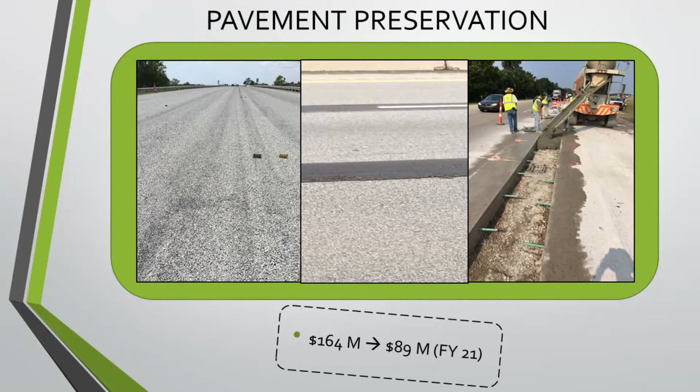So with that in mind, that's kind of the basis behind this particular presentation. I was talking with the designers, the developers, and that's why I went back to the basics on pavement preservation. So with that being said, I kind of felt a little greedy. Illinois is making the comment that they're at $30 million for their pavement preservation budget. And I'm up here about to cry that for FY21, they're cutting pavement preservation from $164 million back down to the baseline of $89 million.

Understanding that the definition of preservation is different for every organization, ours kind of breaks down into 2 different categories. Surface seal, so that being your microsurface, your chip seals, crack seal, and then what we call functional enhancements. So that's, with our agreement with FHWA, 1.5 inch mill and resurface, sometimes 2 inch, work along those lines.

So I wanted to focus on, when I was discussing with the designers, how can we go back to the basics of pavement preservation? And so I took the time to start discussing some of our most effective tools in the toolbox, looking at HMA preservation. First one being crack sealing. I do believe, Larry, that's kind of how the CPM program got underway at Michigan DOT. And ever since then, we've tried to keep it alive, because there truly is a benefit to it. You wouldn't think it of such a simple type of project, but it truly does pay dividends.

So in Michigan, we kind of look at it a handful of different ways. We have it as a pre-treatment for a lot of our surface seal fixes. So if we've got a microsurface, a chip seal, the ultra thin bonded wearing course, what we call paver placed, all these fixes, we require that there is actually a crack seal pre-treatment. Specifications dictate how soon that next treatment actually gets placed on it, whether it's a week, 2 weeks, so on and so forth. So crack treatment is definitely there as a pre-treatment.

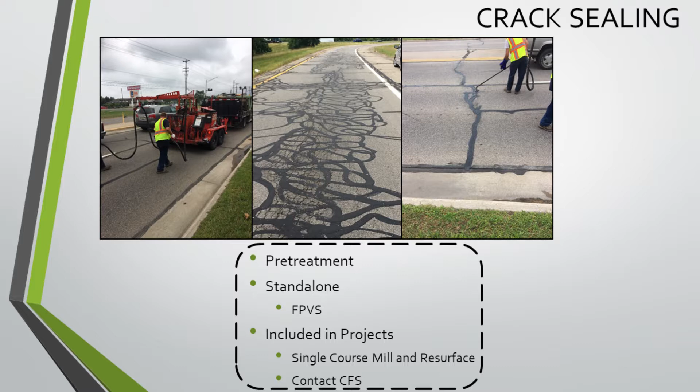We do a lot of standalone crack treatment projects across the state. We tend to utilize an innovative contracting method, a fixed price variable scope. That way we can try to stretch those dollars as far as we can. And then something we actually did for the first time this year. So one of the fixes that a lot of regions like to go to is a single course mill and resurface. In Michigan, unfortunately, we are plagued with way too many miles of composite pavements. So even on our single course, those reflective cracks are coming back through.

Well, in Michigan, we have warranties in place that say, hey, we can't jump on this pavement for at least 2 years, 3 years. Well, you're leaving those cracks open for 2-3 years before we can get on there with the crack seal. So what we decided to do is we built it right into the contract: here's our single course mill and resurface, and we're going to leave that contract open until the next spring. If there's cracks that wouldn't be covered under the warranty specifications, let's get out, let's seal them now.

That project was paved this spring, early summer. So I guess we'll come to find out this spring how many of those cracks actually reflected back through, to see how cost effective that particular method's actually going to be, and see if we want to move forward doing that.

So some of the picture in the middle, it was kind of disheartening getting called out to that site. I got calls going, hey, we got some cars sliding around. You want to come out and take a look and see if you can help us figure out why? That was pretty easy. I mean, I kind of hope for some harder ones.

Andy and I are always on the road all across Michigan. I think Andy was someplace else when I got this call, so luckily he didn't have to endure that one.

But some more on crack sealing, best practice. So I know ISA guidelines make the comment that we want to try to crack seal when the cracks are the widest to be able to make that crack seal material the most effective. However, in Michigan, when we're at those widest cracks, we usually have some form of moisture, whether it's rain or the white stuff. So we do the best that we can. We end up crack sealing in the summer months.

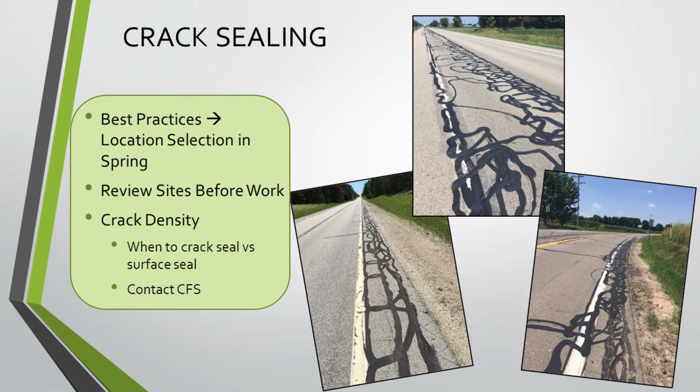However, what I've been doing is trying to encourage our region offices to go out and review these sites early spring to put together the contract documents. The worst thing for them to do is to do it before the winter, because what we start running into is that a road that looked like it was a good crack seal candidate going into winter may not be the same case after the winter, depending upon the winters, the freeze thaws. So I've been trying to get them to kind of push that, and I know that kind of messes with the lettings a little bit, but I think our contractors are responding accordingly.

To help provide our designers a tool, I've been working with our industry groups on trying to develop this concept of crack density, on the amount of cracking that is present within 100 feet, and try to keep it nice and simple. Obviously, nobody wants to spend a lot of time sitting on the side of the road looking at crack seal projects. So the idea was you got 100 foot, 12 foot wide, what type of linear footage of cracking, i.e. the crack seal material that's actually going to be down, makes sense to where, yes, it's a good crack seal candidate, it's a marginal, or we should really be looking at some type of other treatment, a surface seal treatment.

Like I said, I'm in the process of working with our industry groups to try to finalize that, and also try to put some pictures together with that so that our designers and construction staff can go out, take a look and go, like on these fixed price variable scopes, maybe we skip this priority because it's too far gone and we're going to create a hazard for the traveling public. So more to come on the crack density as we move forward.

Chip seals, by far one of the most cost-effective fixes that we have in our toolbox. Again, we were kind of looking at the use of chip seals. Typically, we see these on our rural routes. Northern Michigan, not a lot of traffic, pretty low risk, safe place to put them. However, we've been getting very good performance out of our chip seals, so I've been challenging regions to try to start pushing that envelope a little bit.

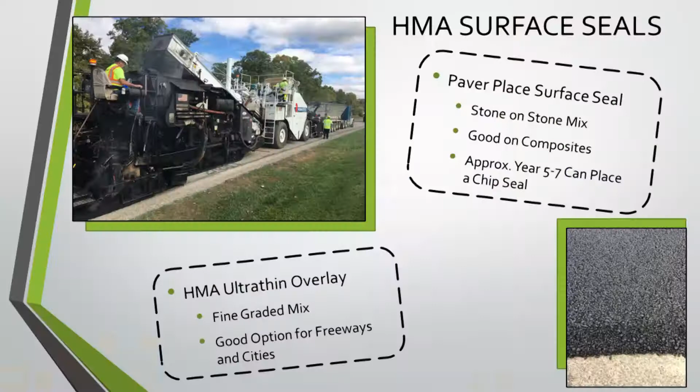I mean, we're seeing good performance out of them where we have them. They seem to be performing pretty good on our composite pavements, which is a plus. And what we've found, at least on one of our projects, is that within year 5 to 7 of them being down, they appear to take a chip seal pretty well, to where we can just kind of continue that PM cycle on that pavement.

The other thing that we have out there is our HMA ultra-thin overlay. I think that is relatively close to what everybody refers to as a thin lay. It's a dense graded, fine graded HMA, standard HMA. And again, we're seeing pretty good performance out of those as well. A lot of different tools in the toolbox when it comes down to HMA preservation.

However, we always seem to kind of fall short when we start talking about concrete preservation. And so that's what I really wanted to hit on with our designers, because again, we're really quick to let our concrete pavements go, which we have a fair amount of miles of in Michigan. We let them go to where we're like, okay, we'll drop some money, we'll do some patches, and then we're going to put a 2-course overlay on them. And in my opinion, you're just kicking the can down the road, because now you just made a mess for yourself to clean up later.

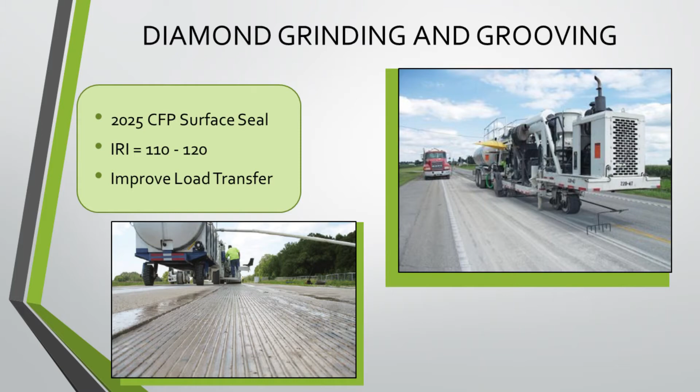So why not start getting on these pavements a lot earlier with the diamond grinding and grooving. Part of our pavement management data that we collect is the ride, which I think everybody does, seeing as how it's a federal requirement. And we've been kind of trying to keep an eye on our concrete pavements. So when these IRIs start getting up around that 100, 110, 120 mark, here's a good opportunity to hop on them and get a grinding on there to kind of help that load transfer, and continue to try to preserve that pavement. Depending upon aggregates, so on and so forth, you may need to add the grooving into it.

Another thing that I tend to see in our travels is in our concrete pavements, when we see joints and cracks like this happen in the panels, we never seem to set any type of capital outlay project up for it. We always just leave it for maintenance. And so you get the classic, okay, I'm going to go in and throw cold patch in it, or we're going to hit it with spray patch. And that kind of really bothers me, just because I feel like we could be doing things better. Again, I challenge the regions to consider these projects for crack sealing, joint sealing, and utilize some of the new products that are out there.

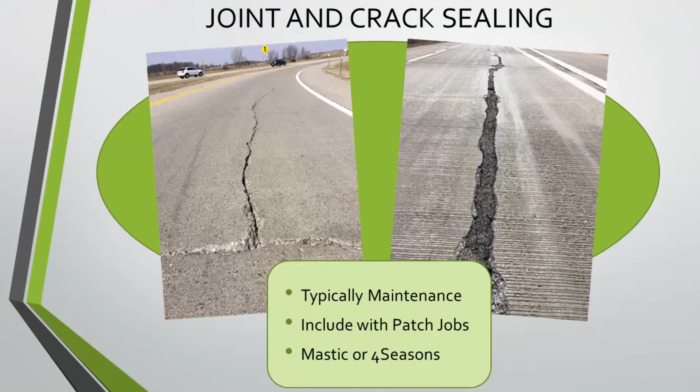In Michigan, we've had a lot of good luck with mastics, even on concrete pavements, on trying to seal up some of these larger cracks that are outside the traditional crack seal material specification for crack width and so on and so forth. So again, there's a lot more we can be doing with our concrete pavements.

And that kind of dovetails into the soapbox that I've been standing on in Michigan for the last couple of years, and to use Phil's word, the champion of, with a lot of support and help from others, is underdrain cleanout. We all know that water is the enemy to our pavements, and one of the things that we tend to neglect the most are our underdrains. We spend millions of dollars on the investment of the underdrains, especially on our concrete pavements. We install these outlets, and then we never do anything with them.

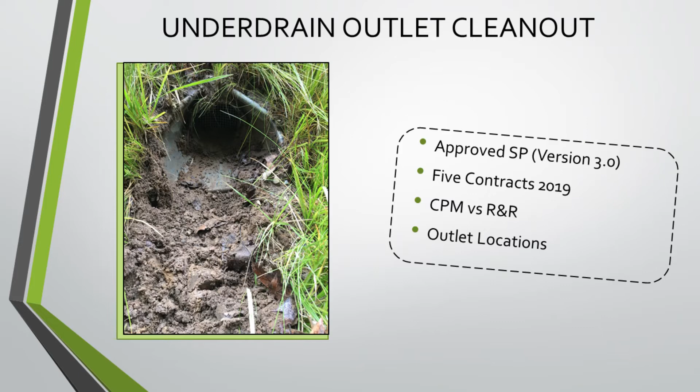You see version 3.0 of the specification. I've had to write and rewrite based upon some comments, so I'm up to version 3.0 of an underdrain cleanout spec. In 2019, I've had at least 5, maybe 6 contracts actually utilizing it. The specification is good for preventive maintenance, and also what we call our R&R, rehab and reconstruction. It's a good tool to help address this, with the biggest obstacle being these outlet locations. We're trying to find these, but we've been finding ways around that and helping out where we can.

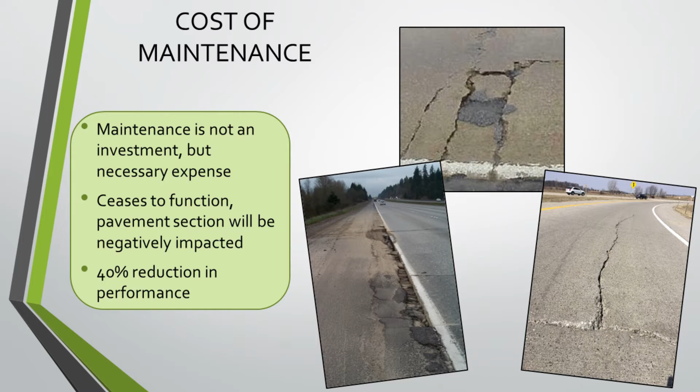So it really comes down to it. On concrete pavements, what do we typically do? We cut it out, we patch it, but are we truly addressing what the issue is? A lot of times when you look at the distress in that pavement, we're cutting out that distress, but that patch isn't addressing what caused the distress. And a lot of times it tends to be water in that pavement section. So if we can do a better job at maintaining our underdrain outlets, it will be very helpful.

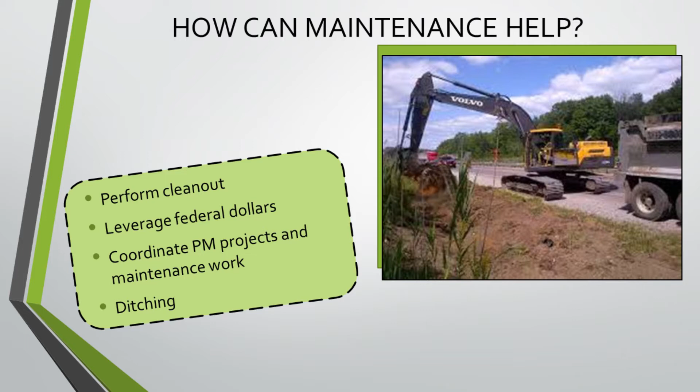The spot that I get stuck on is federal funds will allow me to clean out underdrains. It's that borderline: is this a maintenance activity or a preventive maintenance activity? In my conversations with the feds, they consider it a PM. What they don't consider a PM activity is cleaning out the ditches along the roadside, so I can't leverage federal dollars to do that. However, I was asking my regions to work with their maintenance forces, and if we can coordinate work between maintenance cleaning out the ditches and leveraging the federal funds to clean out the underdrains, it can be more effective at removing some of that vegetation and getting these outlets operational the way they need to be.

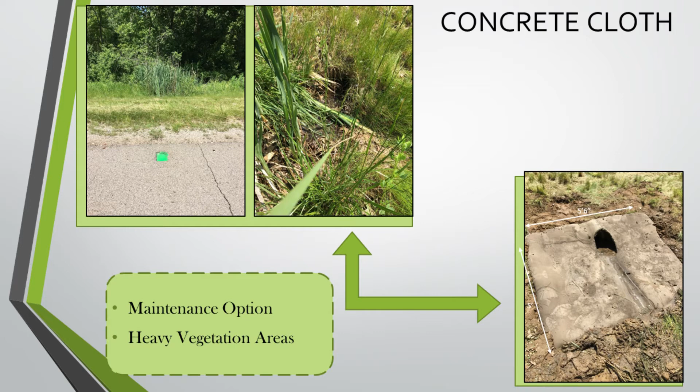And then a little bit of innovation in it too. There are some products out there that I'm looking to utilize to help promote good roadside drainage. The pictures in the top left corner are what you would see driving along the shoulder of an interstate. The little divot in the shoulder usually isn't painted green; we had that one painted green because we knew this was going to be one of our test locations. You see the cattails. Usually that's a strong sign that there's an outlet in there somewhere. The picture next to it is me standing in said cattails looking back, and you can see that the outlet is there, but buried fairly well.

Working with maintenance, we used this product called concrete cloth. What we ended up doing is creating a nice pad with the concrete cloth to protect and give that underdrain outlet a larger footprint, A, so it doesn't get buried by the ditch, and B, to keep the vegetation out of it. So far it's been very successful, and we hope to utilize a product like this in the future in heavy vegetative areas. Underdrains are my soapbox, trying to help promote good drainage and to preserve those concrete pavements.

I guess I will open it up to any questions. I'm curious, and this goes for John as well. I was just curious how far down your treatment options you go. You talked about your surface seal, your functional enhancements, your R&R. When do you, and I'm looking at it through a local agency perspective, so I don't know what the normal DOT thing is, but when do you start doing pavement design to see if that treatment is the right option?

When do you start looking at pavement design to figure out if a treatment's the right option? Is that more or less what the question was? Yeah. It's an interesting question. As I commented earlier, the regions send in their candidate projects to myself, and I have a subcommittee. That's when we take a look at the pavement history, and depending upon what it is, we dig in a little bit further on the pavement design to see if that treatment is the appropriate treatment, or if there's something else that needs to be taken into consideration.